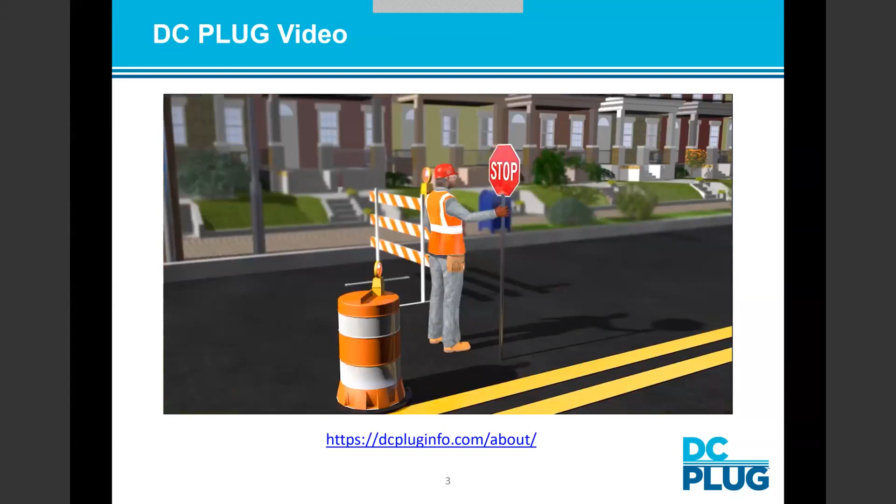You will be notified well in advance of the project start date. This will include the posting of no parking signs. Construction will begin with the coordination of streets and sidewalks impacted in your neighborhood. Signs will be posted and flaggers will direct vehicles and pedestrians around construction crews. Before any digging begins, other existing utility lines that may be in the path of construction will be carefully identified and marked in the field. In some cases, small plants, trees, and grass will need to be removed from public spaces to allow for digging and placement of new underground equipment, but we will do our best to retain as much vegetation as possible. Any public property disturbed by this work will be restored to its original condition.

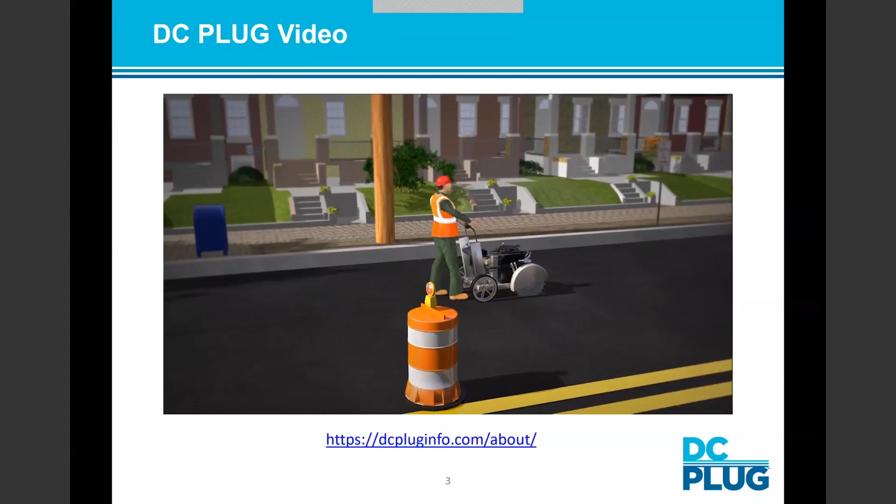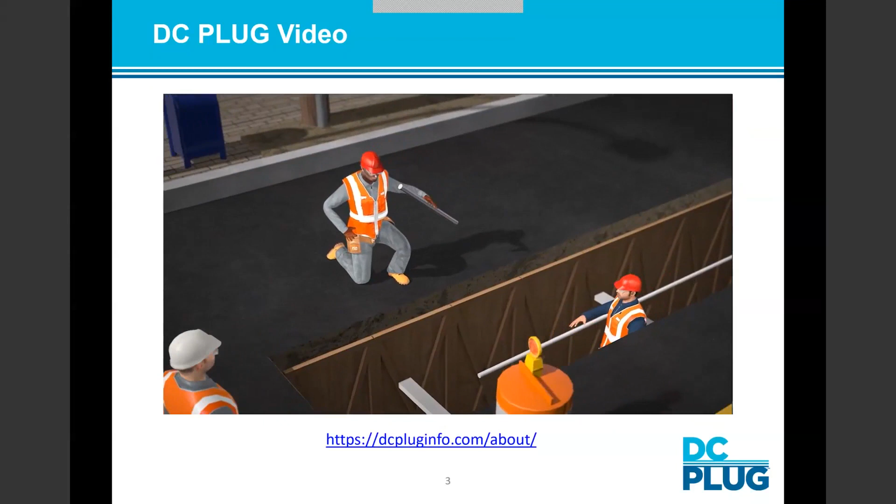Construction workers will use asphalt saws to cut the pavement. A backhoe will dig a trench for placement of the distribution line. Periodically along the main primary line, manholes and tap holes will be required to house equipment and provide access for inspections and repairs. The backhoe will also be utilized to excavate for these structures. In order to meet jurisdictional safety requirements, shoring will be provided in the trench to ensure stability. PEPCO uses either fiberglass or plastic PVC conduit to protect underground power lines. Concrete will be poured into the trench to encase and secure the conduit, and steel plates will be placed over the trench temporarily to make the road usable to vehicle traffic. After the concrete is set, the steel plates will be removed and the trench will be repaved in sections.

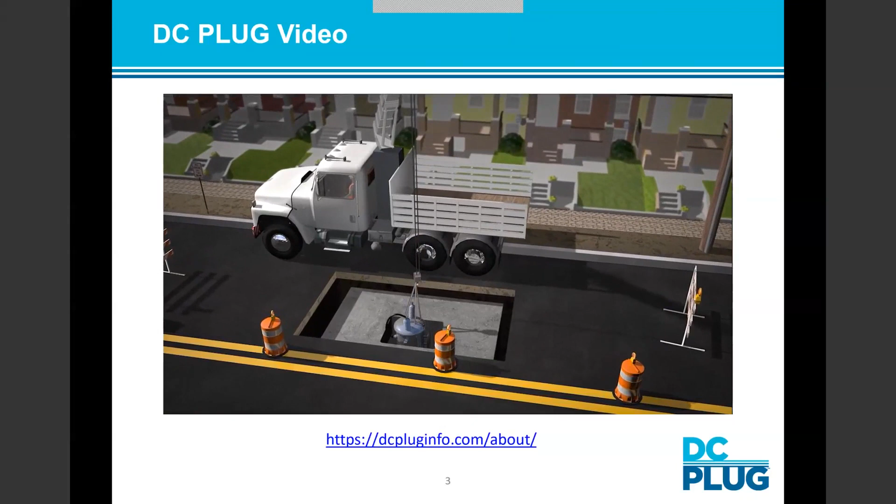Transformers, switches, and other ancillary equipment will be set in place, installed either in the roadway or the sidewalk depending on space availability. Underground cable will be installed. Landscaping will be restored as needed and roads paved. Overhead primary electric wires will be removed from poles, but secondary service and communication lines will remain. Finally, the new underground power lines will be energized. While electricity will remain on throughout the project, there will be a short scheduled outage needed to switch from the overhead lines to the new underground system. We appreciate your patience while the District and PEPCO improve the future of electrical service for the District of Columbia residents.

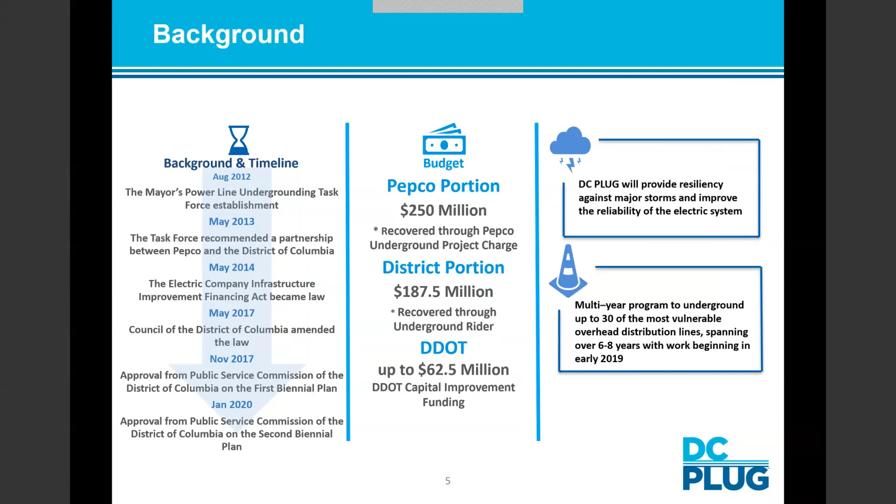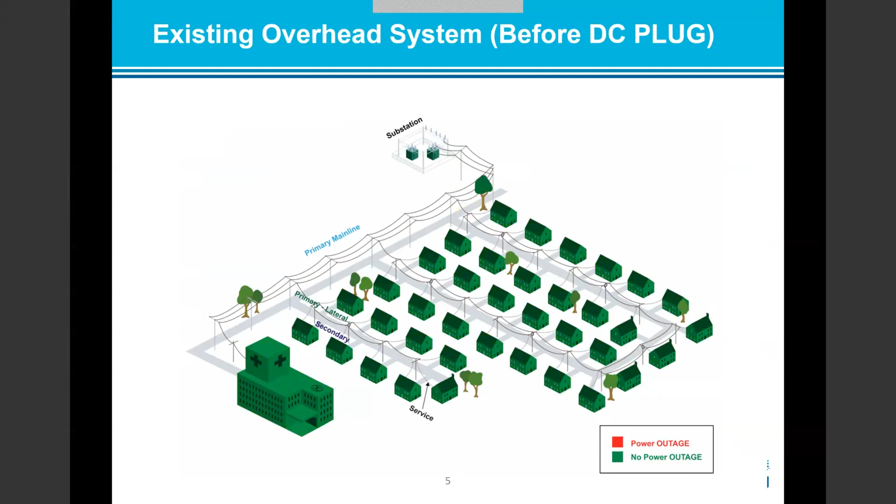The scope is to place these primary main lines and primary laterals underground while keeping the secondaries overhead. The difference on the second slide is when the same tree falls, because the primary is underground, it doesn't impact the entire neighborhood — they all remain green. But if a tree falls on the secondary line, which we keep overhead, you'll still see an outage, though the scope is very minimal compared to an entire neighborhood losing service.

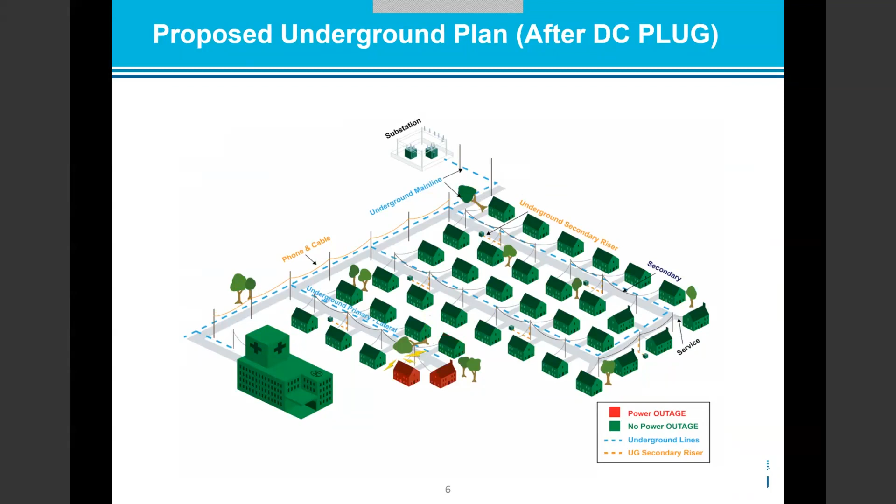That's the general scope, but I want everyone to understand we are keeping the poles in place because they will support the communication lines, the secondaries, and the service lines. We will remove the existing overhead primary line once we place the system underground. With that, I introduce Anthony Soriano from DDOT to discuss the scope further.

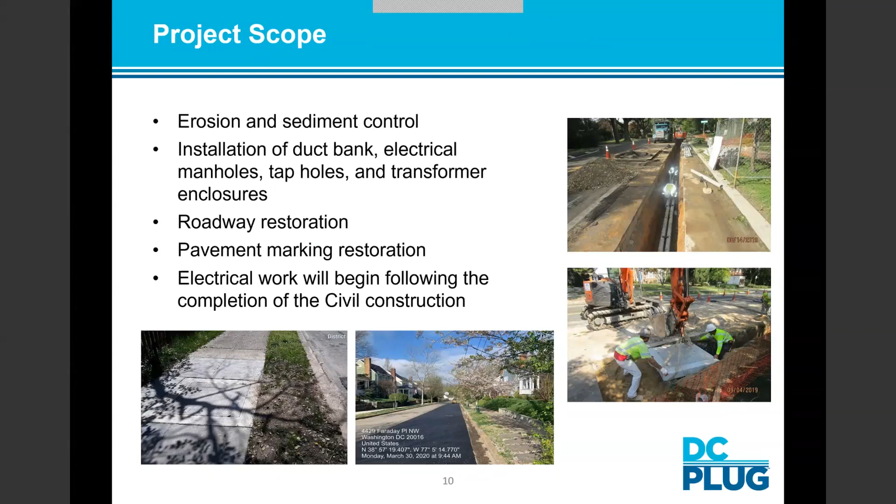This slide shows some scope items associated with the work. When we get into construction, the contractor will mobilize and install erosion and sediment control — essentially protection at the inlets to prevent sediment from getting in during the work. Tree protection will also be installed. Then comes the actual duct bank, manholes, tap holes, and transformer enclosures. We'll follow that with roadway restoration, replacing any pavement markings disturbed during construction. Electrical work will follow the civil construction.

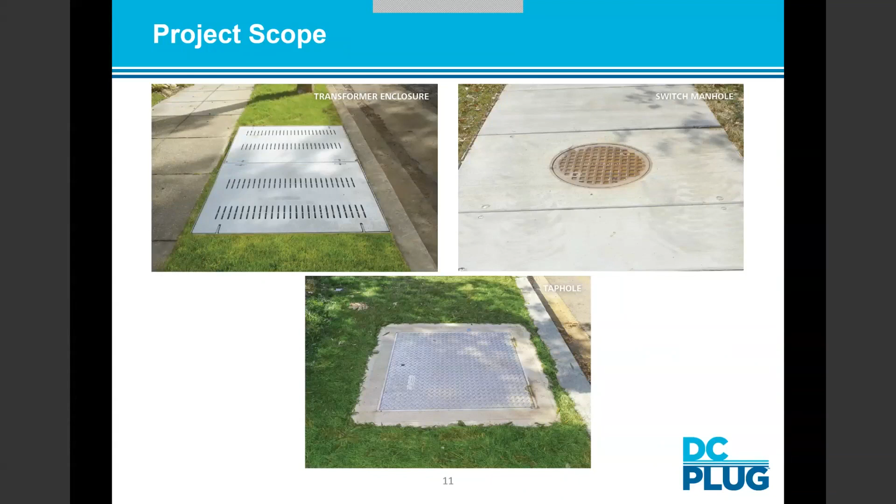Our next slide will show us our project area, with Malcolm X Avenue at the southern border, Martin Luther King Jr. Avenue to the east, Lebaum Street southeast towards the north, and 2nd Street southeast at the west for our limits of this work. Our next few slides are going to move through rather quickly.

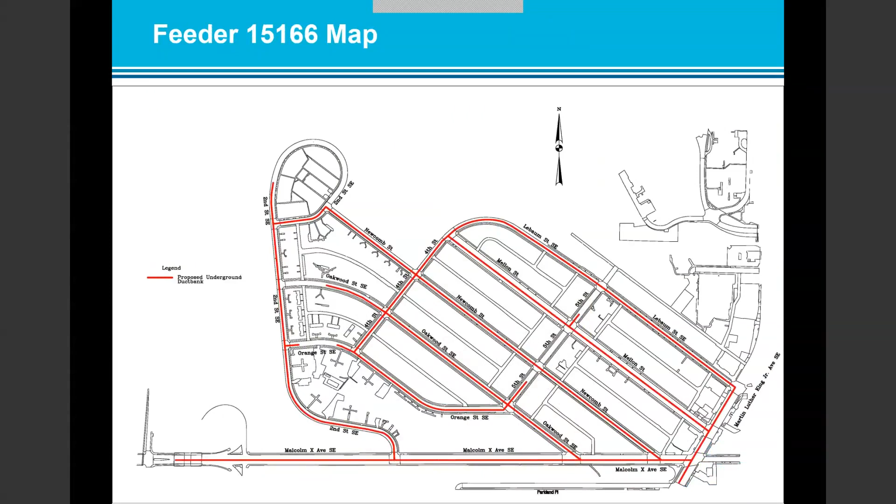These are going to show us the proposed locations of the underground duct bank, which is in light blue, and the structures in dark blue. I want to note that all of our work is within the public right-of-way. At no point do we go onto private property for our work.

Anybody interested in taking a closer look at these slides, they will be shared. This whole slide will be shared on our DC Plug website, and you can also reach out to the email that'll be provided later in the presentation and directly request the information from our DC Plug team.

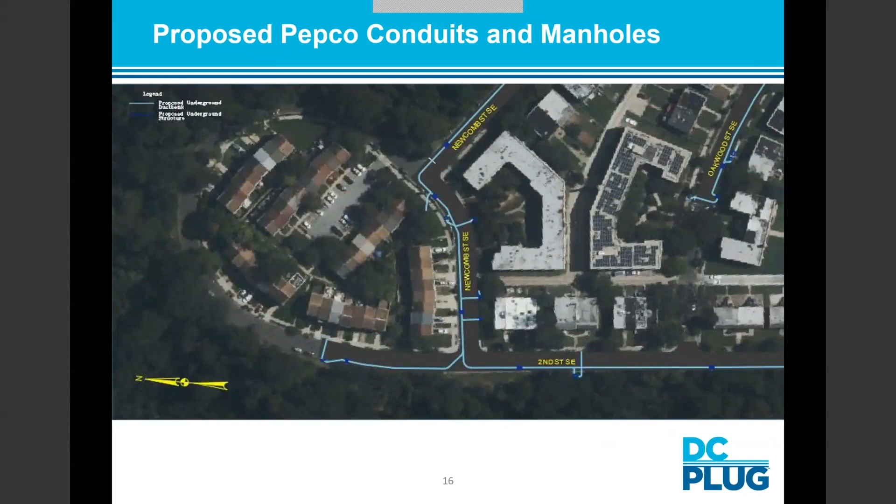So again, the light blue is the underground duct bank locations. Dark blue are locations of those structures that we saw a few photographs of earlier. And all of this work, again, is within the public right-of-way and public space.

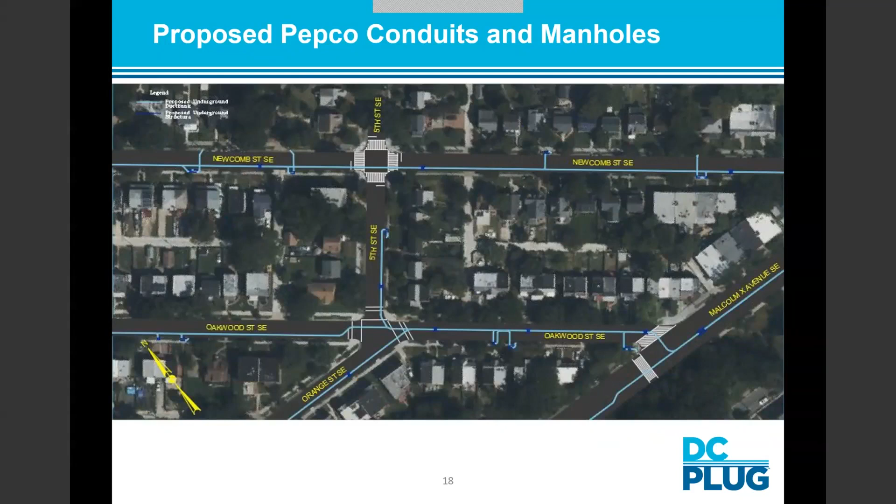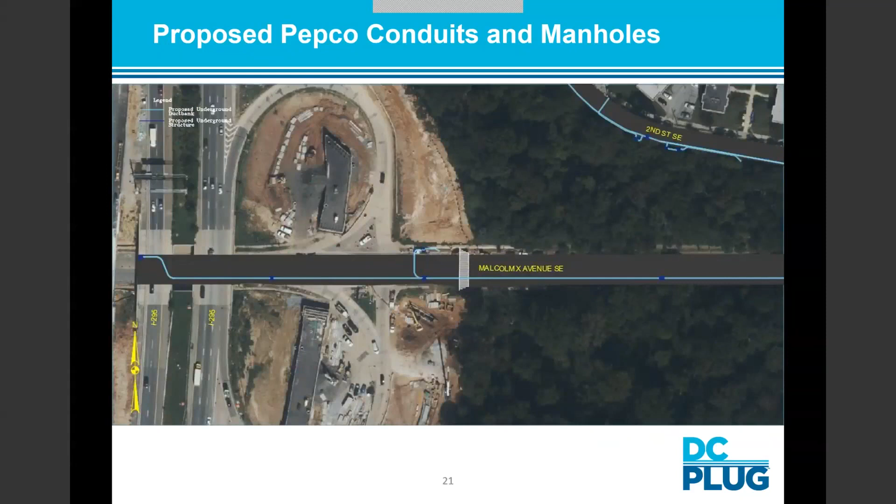Next slide, we talk about our maintenance of traffic, and it's key that we maintain our accessibility for residents and businesses throughout the footprint of our project. There will be some parking impacts temporarily. We will be providing emergency no parking signs with a minimum 72-hour advance notice of the locations that we'll be working through. It's also important that we provide safe accommodations for our pedestrians and cyclists throughout the construction.

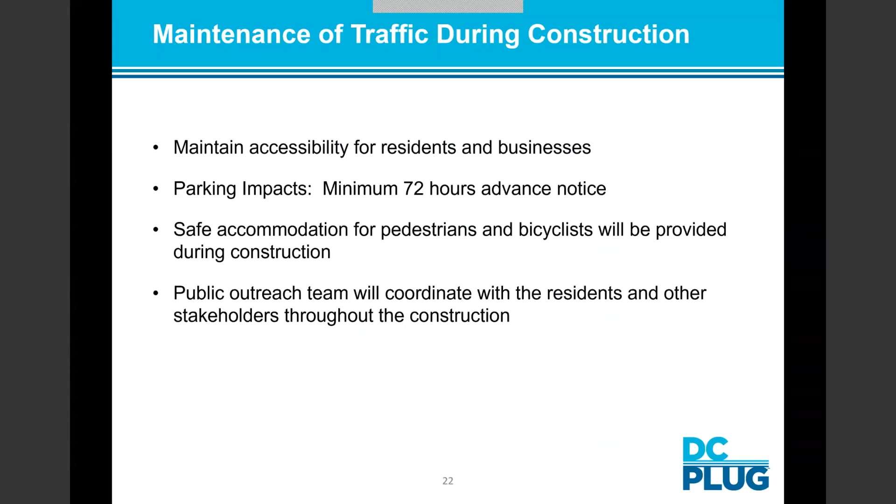And our public outreach team is going to be coordinating regularly. I joke that you'll probably get tired of hearing from us, but it's our job to make sure that you're completely informed, and we make sure we do a great job of providing you with updates throughout the construction. The next few slides are some general maintenance of traffic layouts.

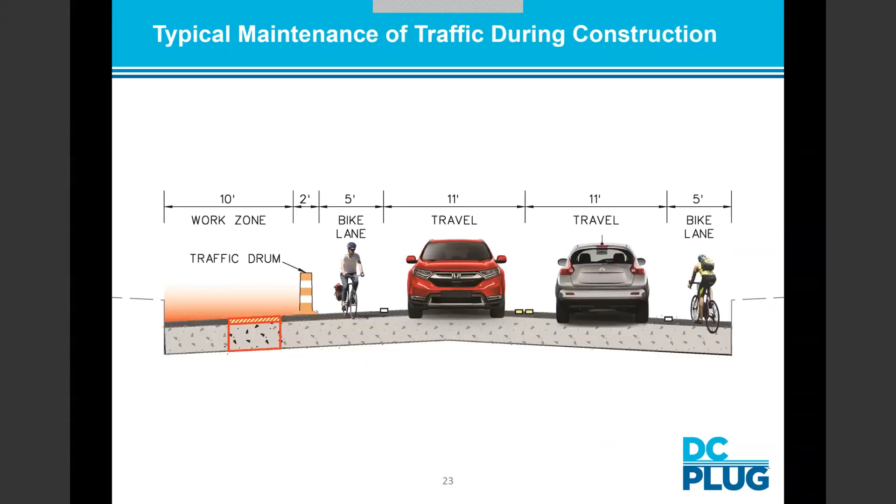Pretty typical work being done behind traffic drums, maintaining traffic flow when possible. If any event requires reduction to just one lane of traffic, there will be flaggers out to make sure that traffic can safely pass and is monitored throughout the work.

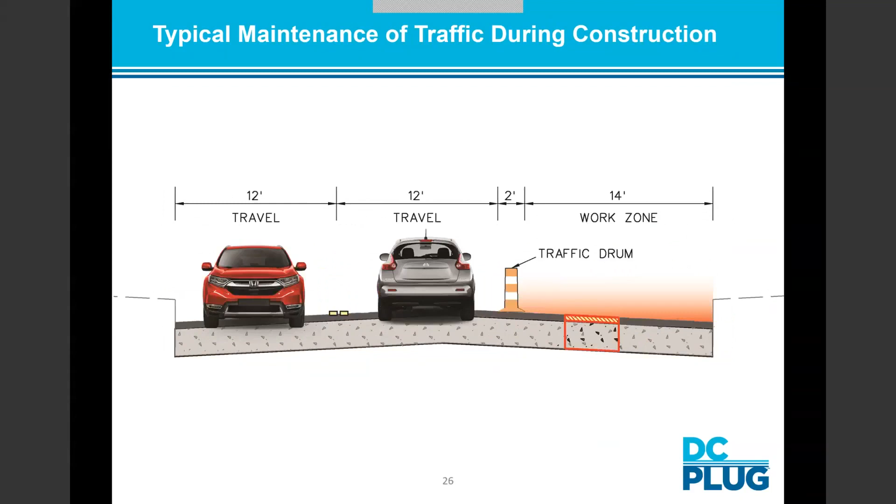Thanks, Anthony. My name is Raisha Quarry. I'm with the communications team, and we're talking about how much we're going to be out there talking to you guys. I feel like Don has talked about it, and Anthony talked about it, and you probably will get tired of us.

So DC Plug has created an education plan to make sure that we are engaged with the stakeholders as much as possible. So with that, during the design phase, we had these open houses. We've been out to the ANCs. We spoke with the council member, and we will be back, like you said.

After this, you'll get phone calls. Certain customers may get phone calls, and we'll be having on-site visits from members of our team to talk about TE enclosures in the area.

For the construction collateral, you'll see things on social media. DC Plug doesn't have its own social media, but you can see it on DDOT and PEPCO social medias. And fact sheets and door hangers will be sent out to you guys as needed, and we'll just be in constant communication with you, to be honest with you guys.